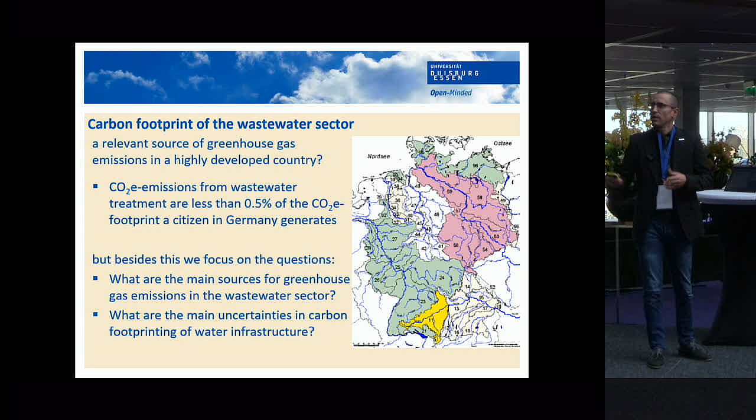First of all, the carbon footprint of the wastewater sector. Here I chose the example of Germany. All the carbon dioxide equivalent emissions from wastewater treatment are less than 0.5% of the carbon dioxide footprint that a German citizen generates in general. Of course, this is very low, but it has a high effect in total.

The main question we should focus on is: what are the main sources of greenhouse gas emissions in the wastewater sector? In general, we talk about wastewater treatment plants, and there we have the highest impact from the direct emissions, like the loss of methane, and the other high potential of nitrous oxide. And of course, the emissions from operation and maintenance, the energy that we need in the wastewater treatment plant, and so on. These two big parts lead to more than 80% of the emissions of the wastewater treatment plant, and only around 10 to 20% are from the construction of the plant itself and the machinery.

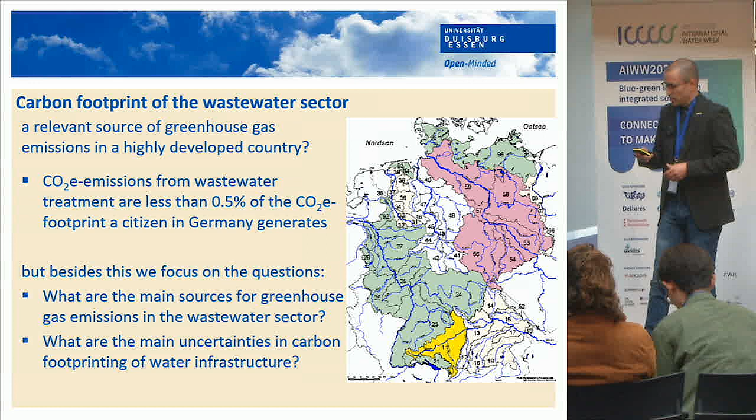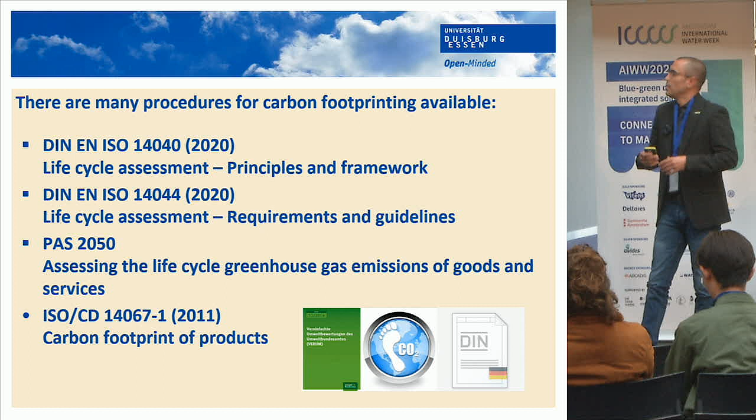And what are the main uncertainties in footprinting the water and wastewater infrastructure? The main procedures for carbon footprinting are available. We have had a lot of norms for a long time, but we're developing a new working sheet from the German water guidelines that will start next year, with a specific balancing frame for the carbon footprints of all products from the wastewater sector and how we can balance all these specific footprints.

Further, we have databases that we use for the emission factors we need. There are a lot of them; I do not want to go into detail on all of them. Important for German and also European construction sites are the Probas database and the German Sustainable Building Council, where you get the emissions free of charge from specific working sheets that you need.

Considering the sources of carbon dioxide emissions, there are three phases. On the one hand, the construction phase. There we have emissions from the construction machinery, the most important ones, the transport emissions, and the raw material emissions. There are a lot of differences depending on which kind of raw material you use, where it comes from, and so on. And the normal focus is on operation and maintenance. Classically, carbon footprinting is done for operation and maintenance. In this presentation, it will be a little bit different.

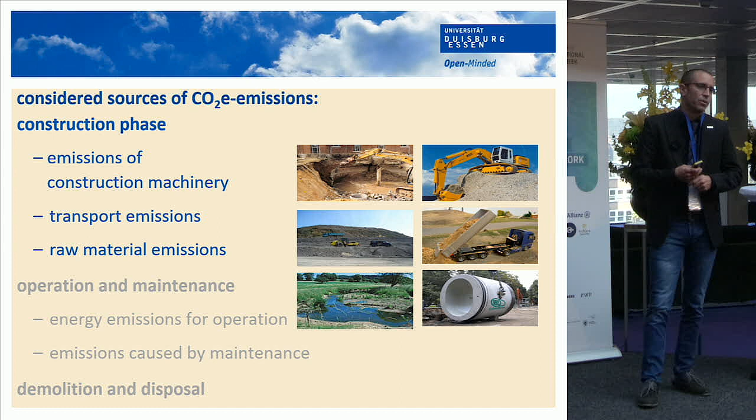And at the end, the demolition and disposal. Here we can also have a look. For a classical wastewater treatment plant, and we have calculated it in detail, less than 1% of the total annual emissions comes from demolition and disposal at the end of life.

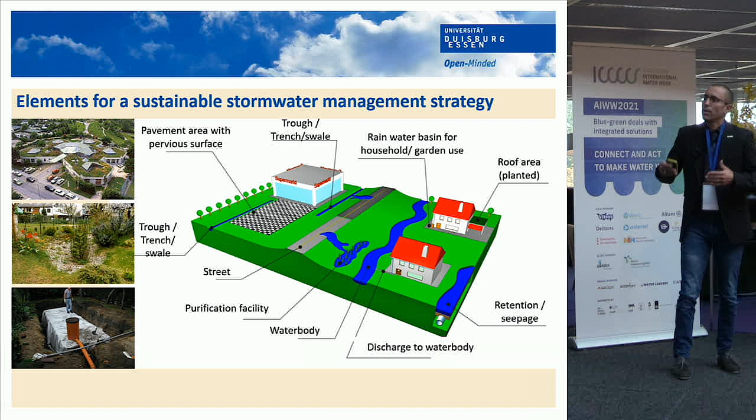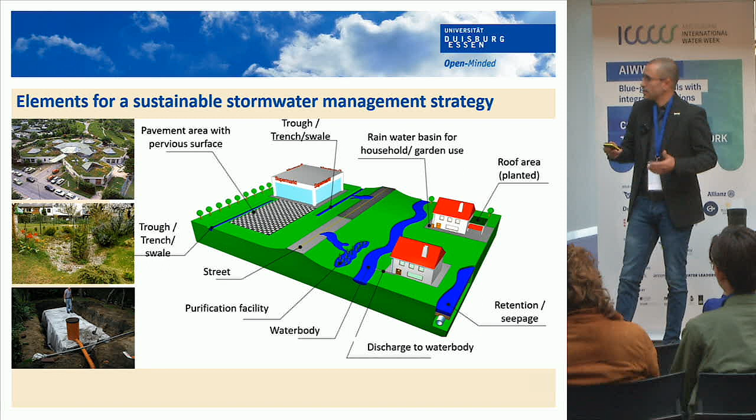Here are some elements of sustainable stormwater management strategies. We have the pavement area with pervious surfaces. Then the other ones: the swale trench, the streets, the purification facilities, water bodies, the discharge into the water body from the households, the retention that we have. Also the examples we heard in some talks before: the planted roof area, the rainwater basins for household and garden use. There are a lot of possibilities for sustainable stormwater management, but what about the carbon footprint of these elements in the wastewater strategy?

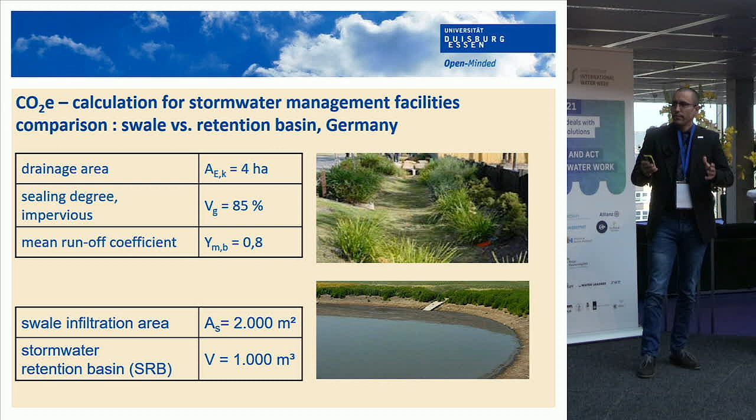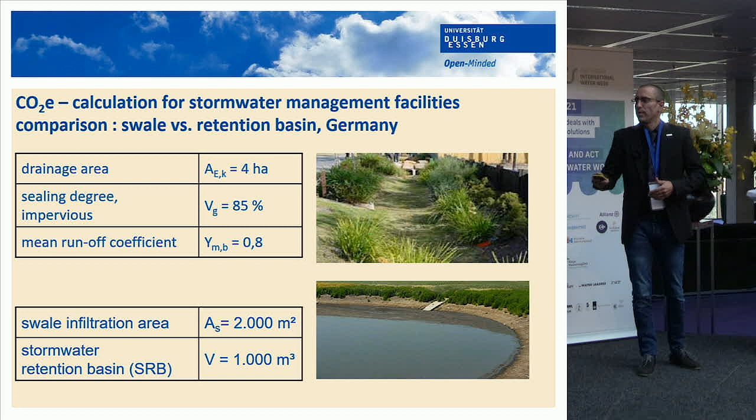Therefore, I just want to give you a short example of a comparison between a swale and a more or less decentralized retention basin in Germany. On the one hand, we have a swale infiltration with an area of around 2,000 square meters, and a stormwater retention basin with a volume of 1,000 cubic meters in the same area.

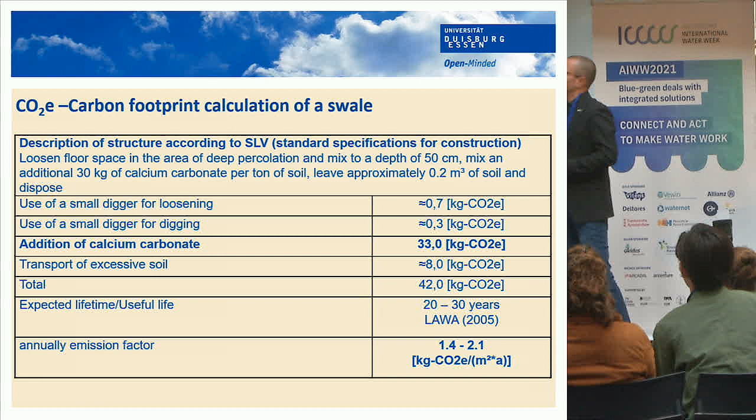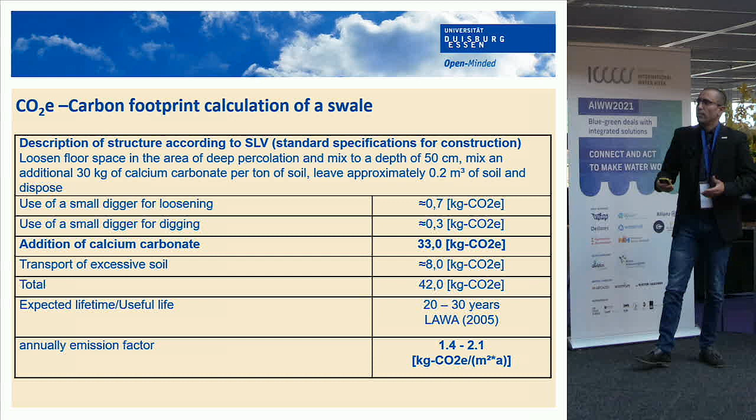This is the addition of calcium carbonate that we need for the soil itself in this specific case. But you can see that the most important impact here comes from the addition of the calcium carbonate, which was needed for the soil itself. So here you get in detail around 42 kilogram carbon dioxide equivalent emissions per square meter when you need the calcium carbonate. If you do not need it, it's around just 9 kilogram.

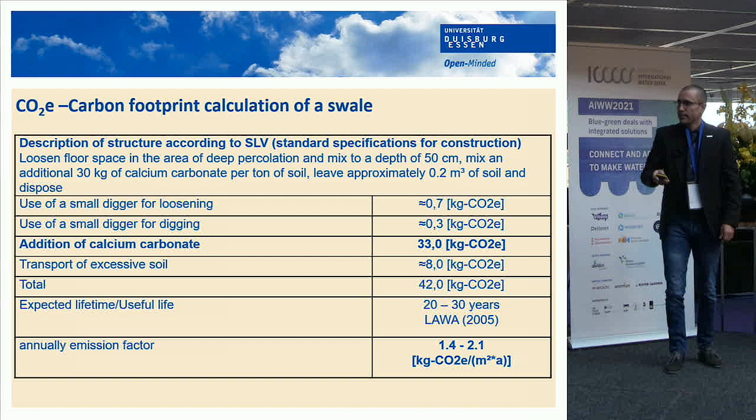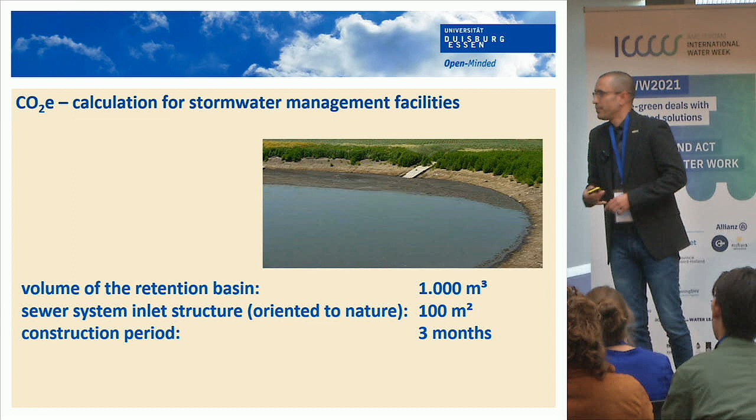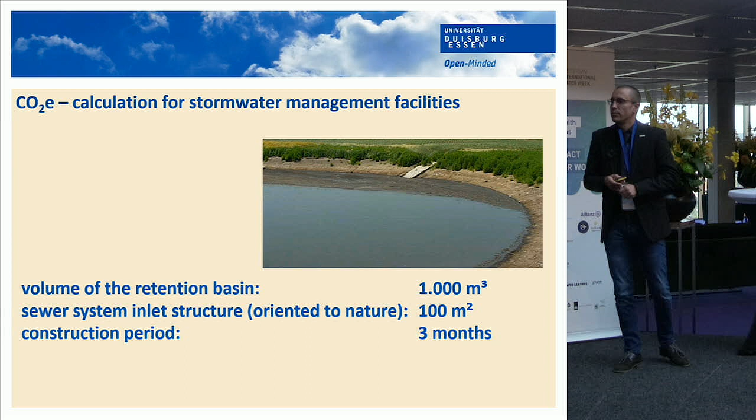This leads to a specific annual emission factor between 1.4 up to 2.1 kilogram carbon dioxide equivalent emissions per square meter and year. The other one that we calculated in detail is the stormwater retention basin that you can see here in the picture. It was around 1,000 cubic meters. We have a sewer inlet structure that is additional to the swale that is necessary. This is very short in this case, but this leads to the specific boundary conditions that we have there. And the construction period for this case was 3 months.

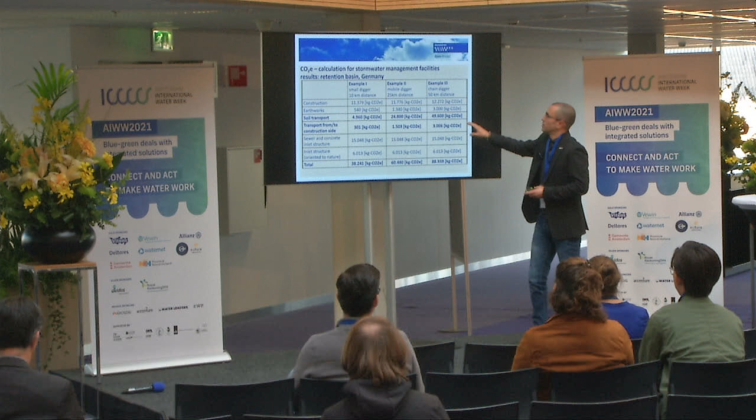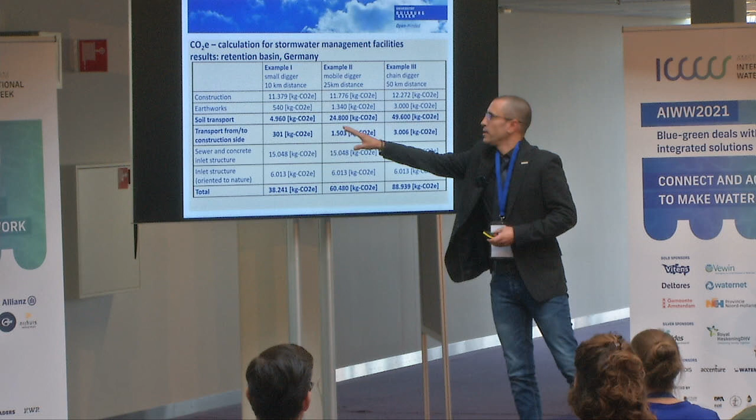Here you see three different calculations for the retention basin here in Germany. The three examples are divided by a small digger and very low transport distances, then a mobile digger, which is a little bit bigger, and a transport distance of 25 kilometers, and the last one with 50 kilometers and a chain digger. For example, the construction itself leads to something between 11,000 and 12,000 kilogram carbon dioxide emissions. The digging between 500 up to 3,000 kilogram.

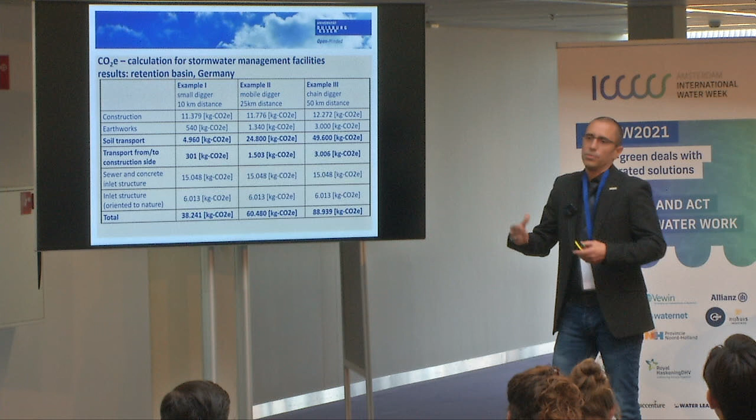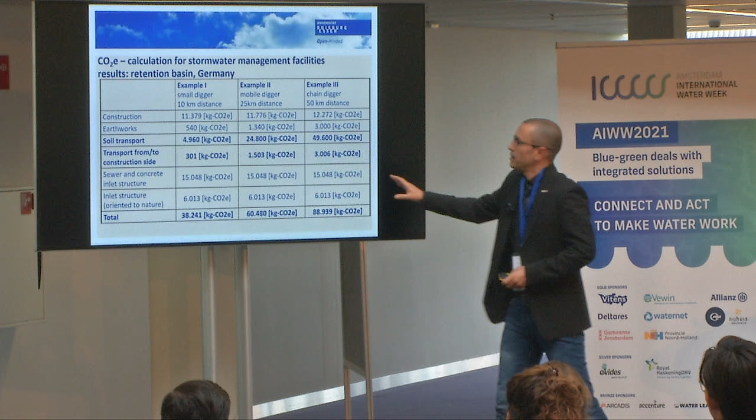But one main source of the emissions is, of course, the soil transport and the transport from and to the construction site. Then on the other hand, the sewer that we need and the concrete inlet structure was around 15 tons, and the inlet structure oriented to nature was around 6 tons. But the main focus that we always have for our calculations is the transport, and to minimize the transport distances to reduce the carbon footprint of these specific facilities.

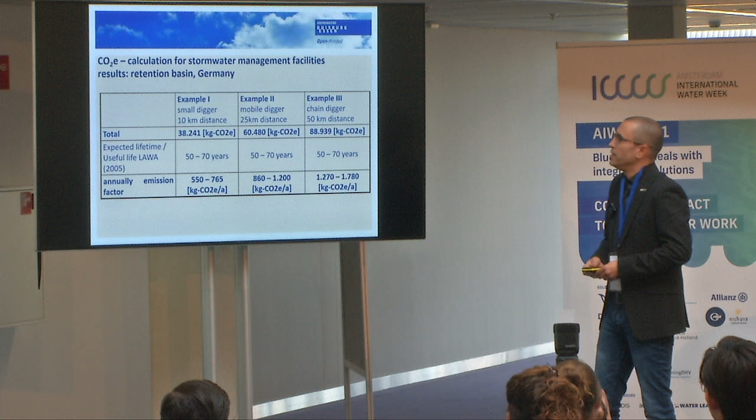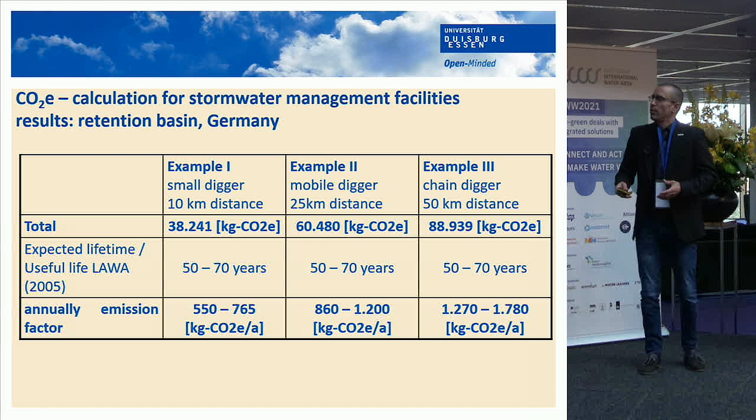Here we receive a specific annual emissions factor which is, in the best case, around 550 kilogram carbon dioxide equivalent per year, but it could go up to 1,800 kilogram carbon dioxide equivalent per year, only by the different transport distances. In this case, for the example itself, the calculation is not really correct.

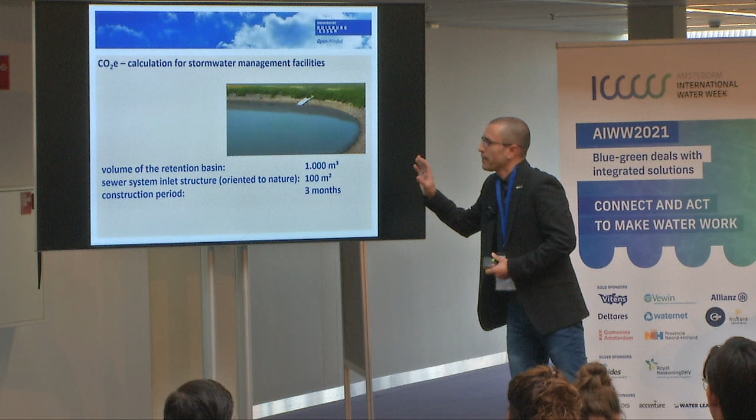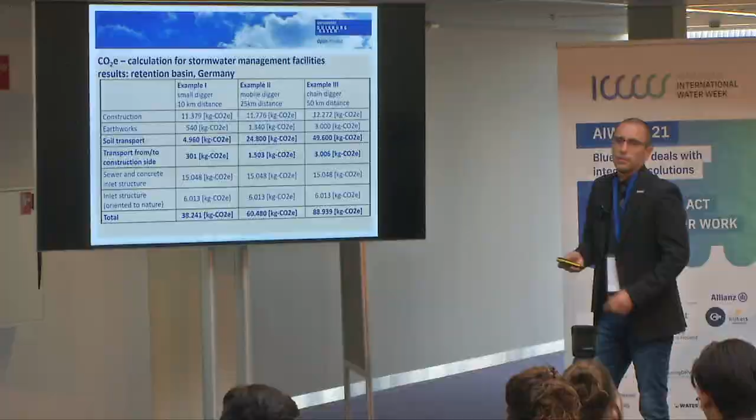We need a specific sewer inlet structure to bring in the water. It was designed in detail, and everyone thought in the beginning that it would be constructed on the construction site. No, it was constructed in Russia and transported to the site, and so it had a horrible footprint.

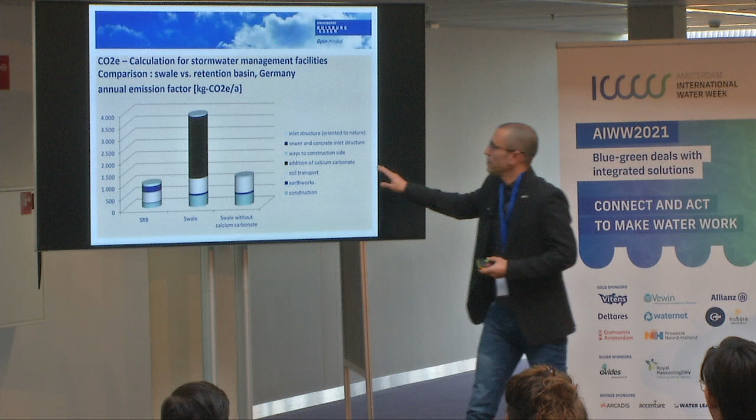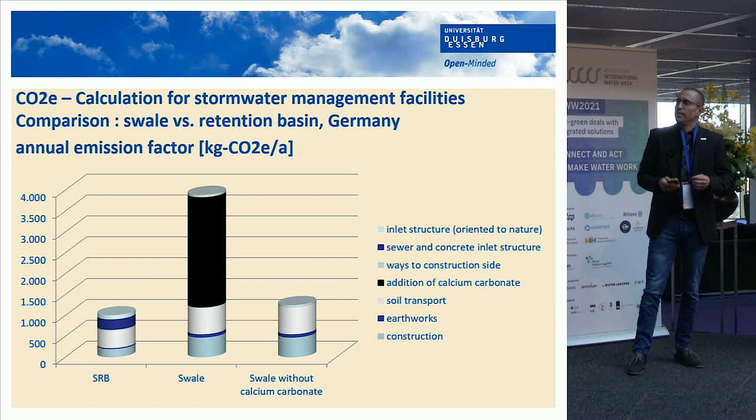Here, just to see the impact on the annual emission factor for these two different systems. The main driver is the addition of the calcium carbonate that we need for the swale. So we cannot always say a decentralized system is good or a centralized system is the better choice. This has to be calculated for the specific targets. But we have, of course, other possibilities to optimize the carbon footprint.

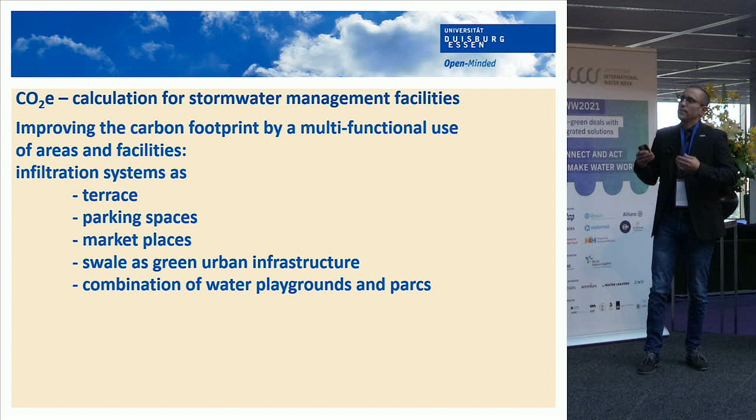The best way to optimize the carbon footprint is the multifunctional use of the areas and facilities that we have. For example, we use as infiltration systems terraces, parking spaces at shops, and marketplaces. There, direct infiltration is the best opportunity, not only from the carbon dioxide emissions balancing. There are a lot of other advantages, but the multifunctional use is the best way. And also the swale as green urban infrastructure, combined of course with playgrounds and parks.

For retention basins and overflow basins, we can also use parking spaces with low depths for storage, ensuring dry access for the cars. Marketplaces could also be possible with the specific depths we look for. And of course public parks, or streets, would be available for this.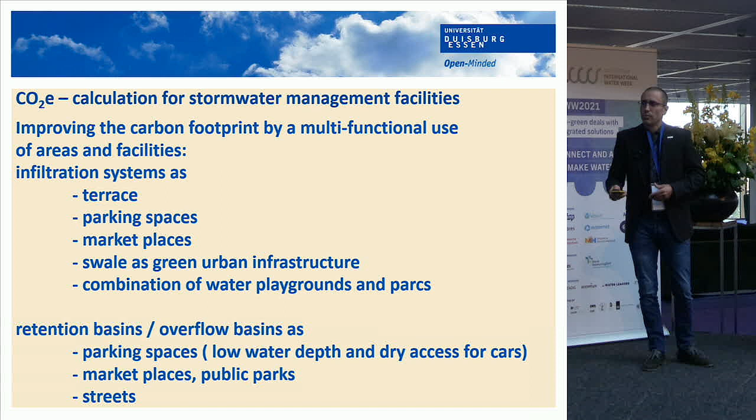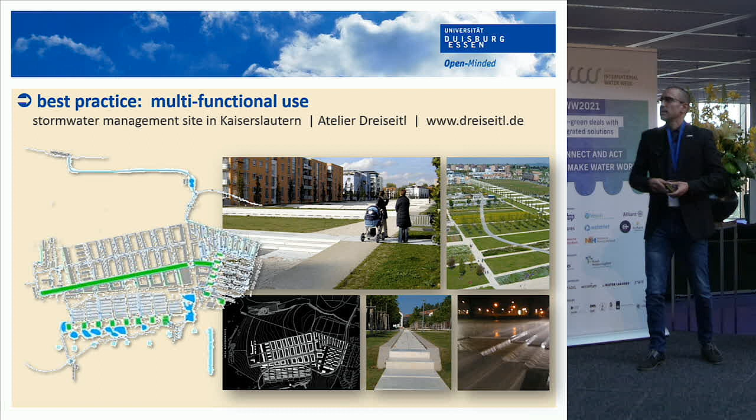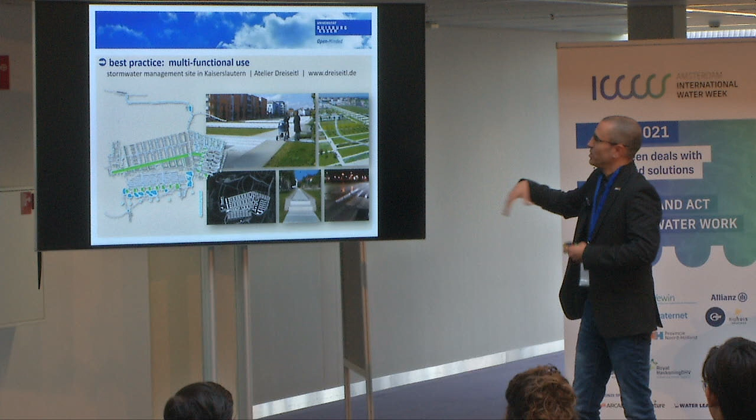Here are some best practices that I want to show you at the end of my talk. It's the multifunctional use. Here is stormwater management in Kaiserslautern, from Atelier Dreiseitl. It's the only good example that I have from Germany. The other ones are from the Netherlands, because they are more or less the world leaders here. Here we see the multifunctional use of the water, for example a runoff during a heavy rain event from these specific parts.

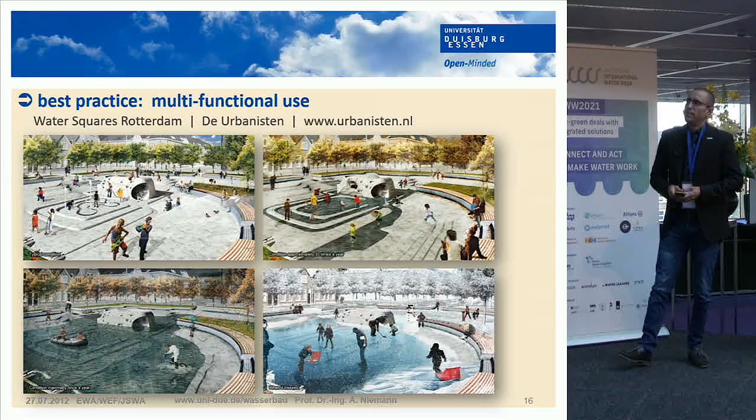The water squares in Rotterdam are a very interesting idea for multifunctional use of these different areas under different conditions. For example, here are the conditions showing how the water runs up during the different situations.

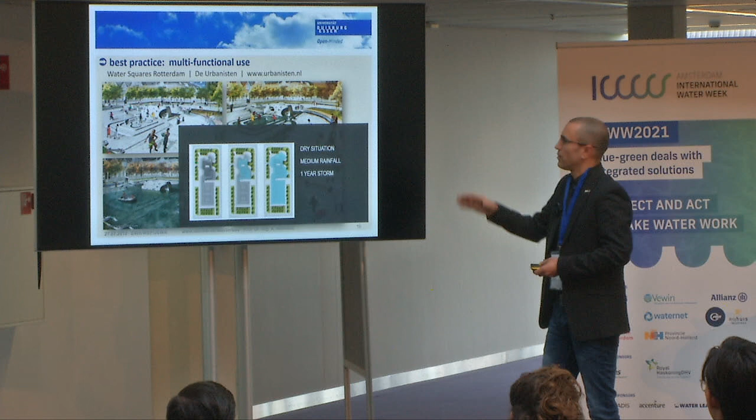On the first one, we have here the dry situation. Here we have a medium rainfall, and the last one where the area is flooded. It's roundabout for a 1-year storm.

The next one is the changing waterscapes in Singapore. It's also from an architecture consultant here from the Netherlands, from De Urbanisten. And here you can also see the multi-use of the different areas and also the use of the water.

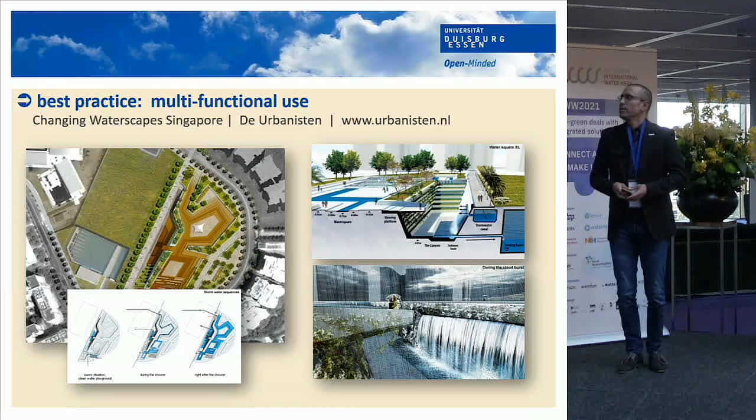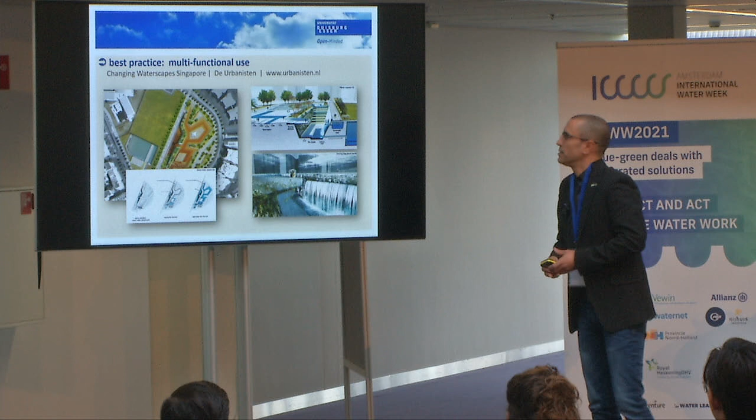Here we have the stormwater sewer, the outtake, and to get the water again to the surface. We got here the canyon, and then just at the end an existing basin to reduce the water intake there. That would be the end of my talk.